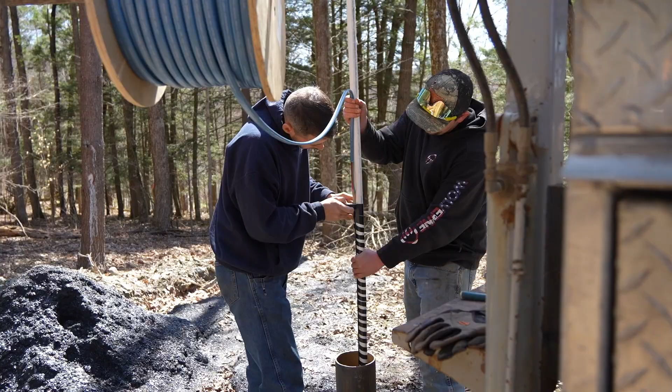There it is, there's the pipe, and they're taping the wire on the outside of it. This is how they do it. At the very end of that pipe is the pump, and you can see that right there. This has got a 5-year warranty. This is your motor. It's water cooled. The water comes in here. You can see there's a screen underneath there.

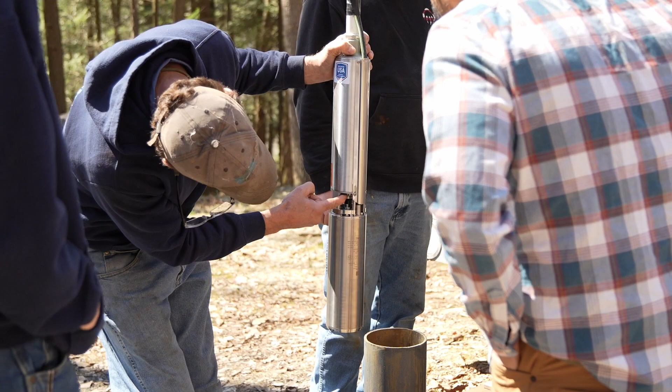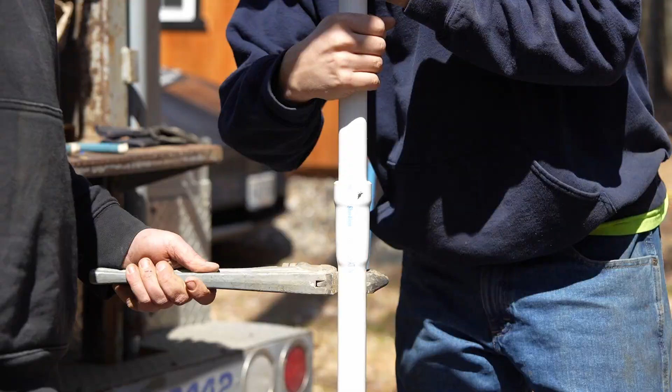Yep. And then to lift the water inside, there's tons of little parts which create, we lift it one stage to the next stage to the next stage. From there, they lower the pipes one at a time, and they're going to fasten it like they're showing right there. And they're going to continue lowering that all the way down to where they feel appropriate.

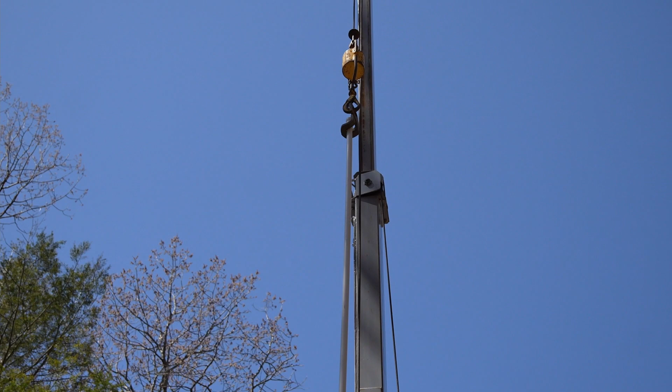I think mine went to about 150 feet or 200 feet, even though the water was visible from about 50 feet. At the very end of that pipe there, you got to get this kind of cover that goes on top of it where the wire comes out of it. And this is the end result. Basically, that's a water tank that is used to help create the pressure needed to get the water up the well.

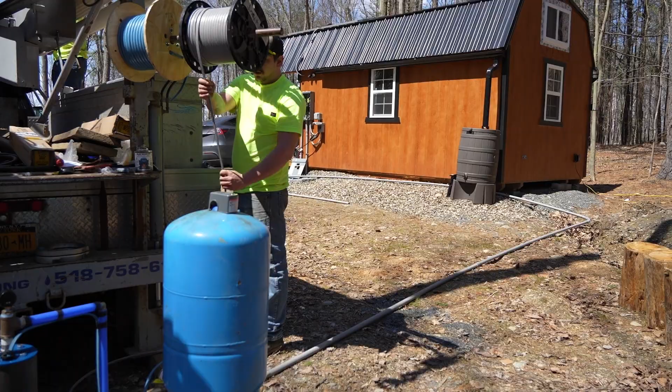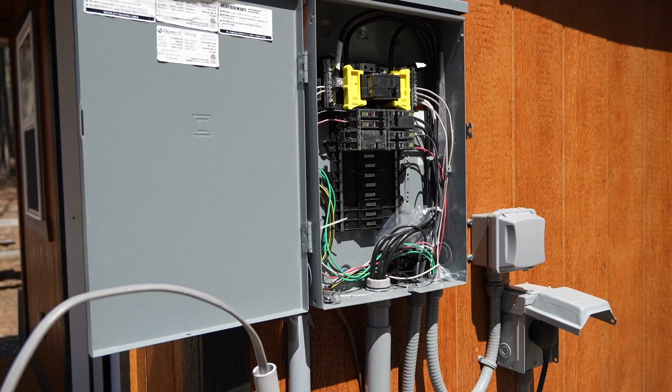Here is the conduit that's laid out where the blue wire went through, and that blue wire goes all the way up there and into the power. So this is how the water pump way down below will get the power. When the switch draws on, the switch is closed, pump is running. Pressure builds up, switch kicks out. Yep. Okay.

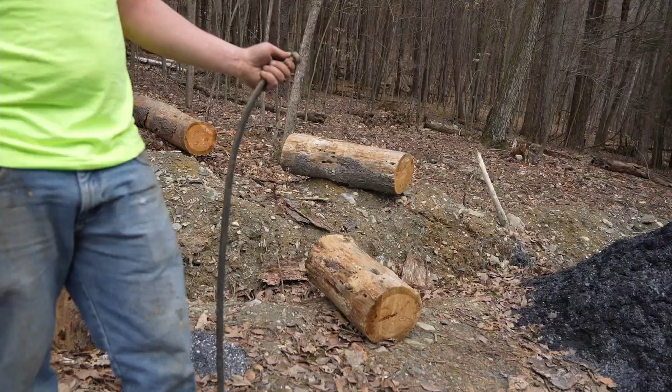All right. First sign of water at the land. That's awesome. That's actually surprisingly clear. All right, so we just finished wrapping up with day 2 of our well stuff. We have Smith Well Drilling here with Jeff, the founder himself, and Matt and CJ. CJ, right? Yep. Cool. And they've been super awesome helping me out here today.

It was super simple. But I figured I'll let you guys kind of share a little bit what you guys did today, what to expect in the future, so our viewers can have an idea what to expect. You got a great well. I believe it was 320 feet. We got over 10 gallons a minute. Water's nice and clear, no sulfur.

So at this point we connected and installed the pump and a temporary tank, and so we've got water to the cabin for the weekend. And once they complete their build on the main house, then we'll pipe over to that and tie everything in. But at this point everything's looking good. Water quality looks great, and I think you got a great water supply, and our guys at Smith's wouldn't be able to do it without them. I want to reiterate on the camera, these guys did such a good job.

They were able to call me really early the first time when they came and let me know the timing of things. I was a little nervous about it, like, I hear a lot of different stories, success stories and failure stories, and they've always been very honest and upfront about what to expect.

Actually, what's your service area? We cover approximately from I-84 north up into Washington County, Saratoga, Albany, Rensselaer, Columbia, Dutchess, Greene, and some parts of Ulster and Orange County. So a pretty big area of upstate New York. Upstate, yes, upstate New York, right? Yeah. So if you guys need somebody like that, these guys are the guys to call.

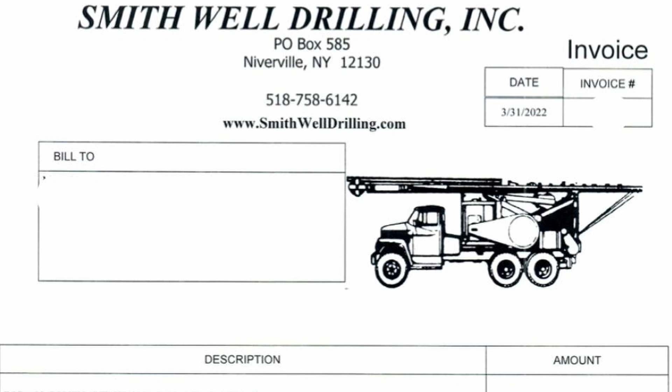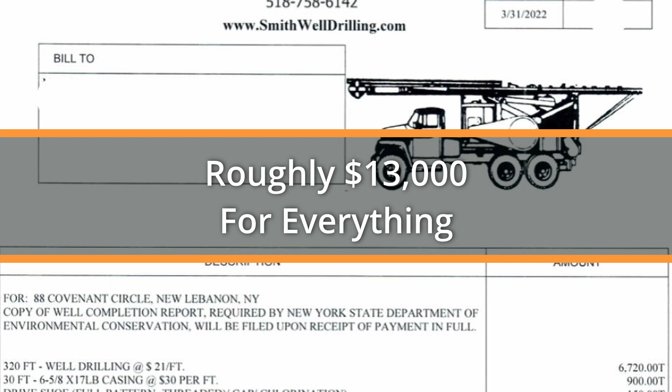Okay, so to answer the big question now, how much did it cost me to get a well and to get running water at the land? Well, the total comes down to about $13,000 to dig the well, to have it inspected, to have the well pump installed, to have it connected to the water, basically from a raw piece of land to a raw piece of land that has running water. So that's my price over here in upstate New York at the time of this recording. Of course, that could be different depending on where you are.

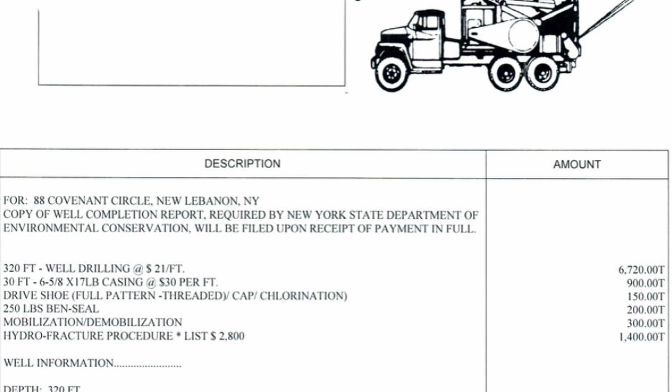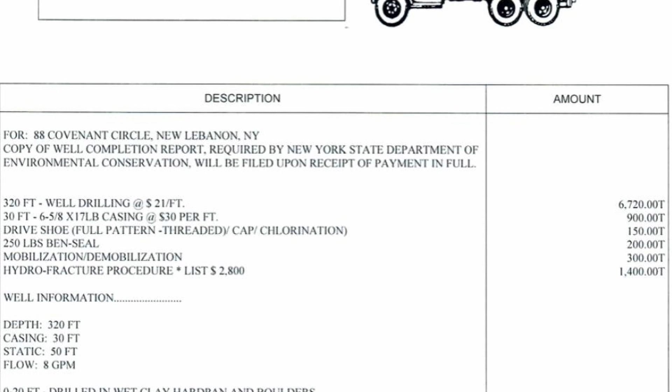But what you should really look for when comparing prices is the credibility, relationships and customer feedback the company has had in the past, obviously. And also, the number you should be looking at is the price per foot in terms of how much it costs to drill.

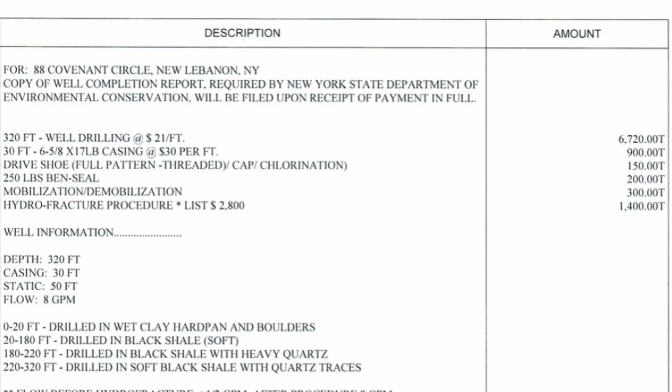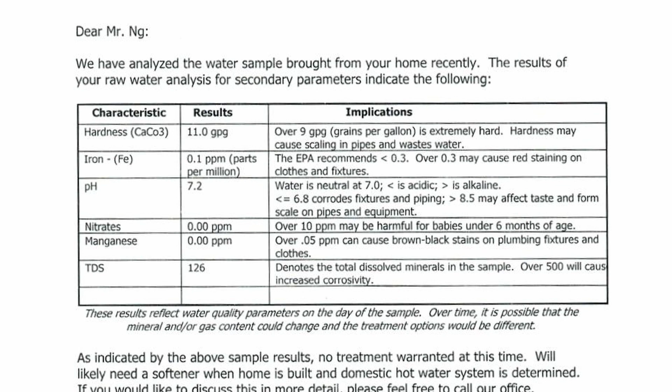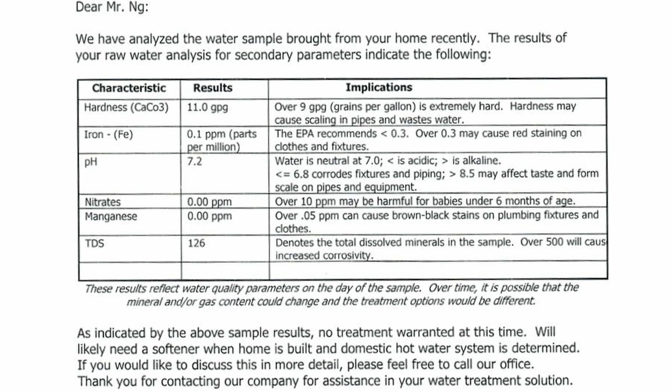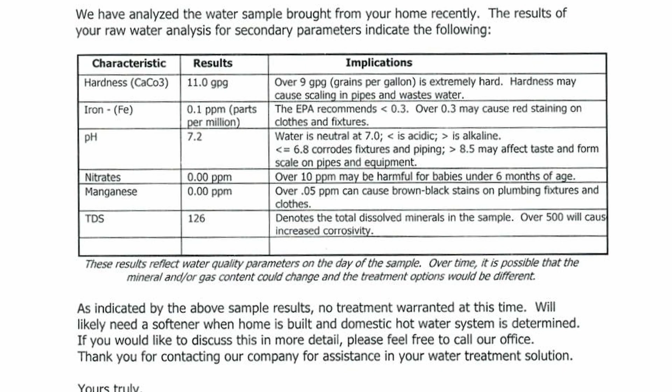And if you're wondering what the results are from my water test, it looks like everything is great in terms of what's expected. There's no E. coli or anything, so it's completely safe to drink. The only thing that was higher than usual is the hardness of the water, mainly because I'm up on a mountain and I have a lot of shale, a lot of rocks. At least that's what I'm thinking is the reason. But there's no harm in hard water to drink and shower in. And in the future, once I'm done building the house, I'm going to have a water softener, so it's kinder to the pipes and fixtures of the home.

Well, that's it, guys. Thank you so much for joining me today. I hope you had a good time following me to learn how to drill a well, how much it costs and how to get running water at your land. I'm super excited for this. It's going to be creating a lot of creature comforts for Sarah and I. And also, we have a very special surprise coming our way that will utilize this new access to water. So stay tuned for that.